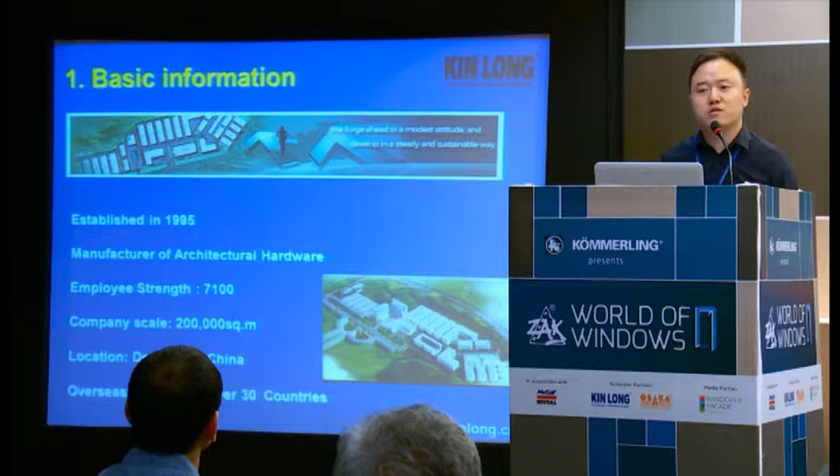It's about 2 hours by car to Hong Kong. Our branches now cover 30 countries, including Asia, the Middle East, and Africa.

Now, Kinlong achievement. We are China's biggest architecture hardware manufacturer, and we are China's biggest architecture hardware exporter. This information is from China government authority statistics. Our turnover for the last year was 25 billion rupees, which is crazy, I think. Our technical strength includes over 500 technicians, and we have 1 national lab. I mention this national lab is appointed by the China government, and Kinlong is the only one.

Our main products, I can explain one by one. First is aluminum doors and windows hardware fittings, the material is alloy. And UPVC door and windows hard fittings is also alloy.

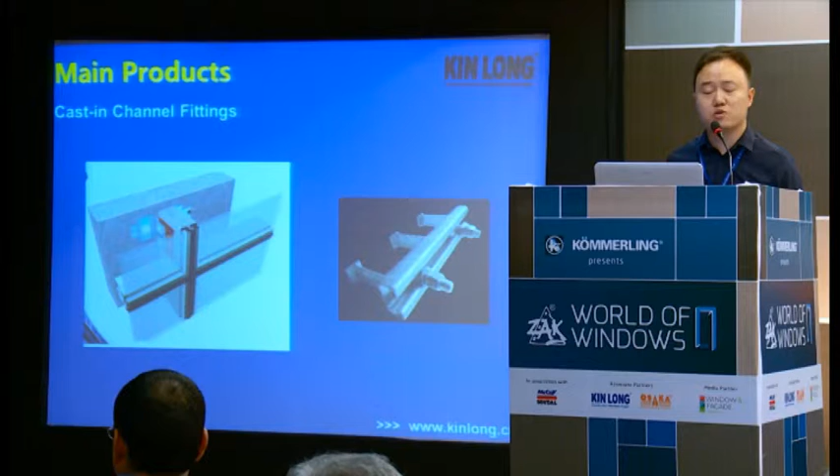We also provide cast-in channel fittings, the material is carbon steel or stainless steel. And indoor balustrade hardware fittings, you can see the double plate pillars, glass clamp, and bracket.

And outdoor balustrade hardware fittings. This product is used in a Middle East project.

And door control hardware fittings like door closer, floor spring, and glass clamp. And bathroom hardware fittings, glass clamp, glass door handles, multi-point lock and smart door lock.

I strongly recommend our stainless steel rod and cable system because we have a strong team to design the whole facade system and give you the solution for configuration, how to use it, and which part to use with our fittings.

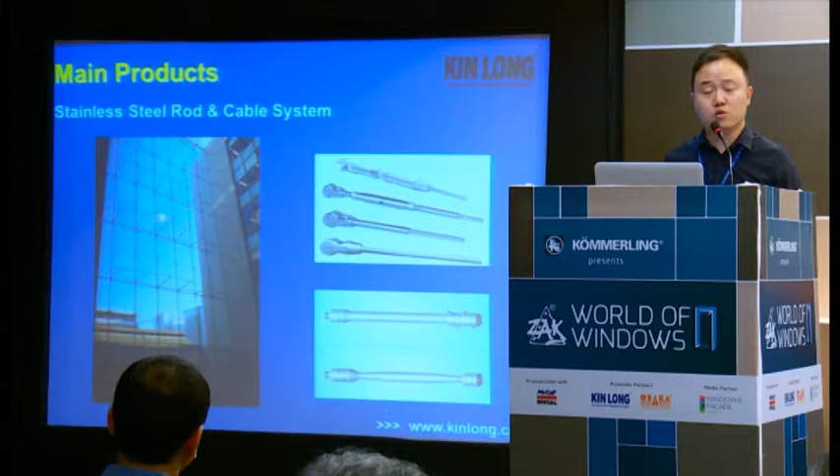The second part is the Kinlong quality control policy. Why is Kinlong so strong? Because we have a stringent quality control system. One, we refer to the ISO system, and the other is our China National Lab test.

This is a certification of ISO. This is our Kinlong in-house laboratory and testing center.

You can see the first picture is a lifespan test to test the handle cycle used. Commonly, Kinlong handles are used for over 25,000 cycles. The other is the optical spectrum test and chemical component analysis to check the purity of the materials and make sure the client is satisfied.

And the picture below shows the inside of our plant, with some coating, some packing, and some assembly.

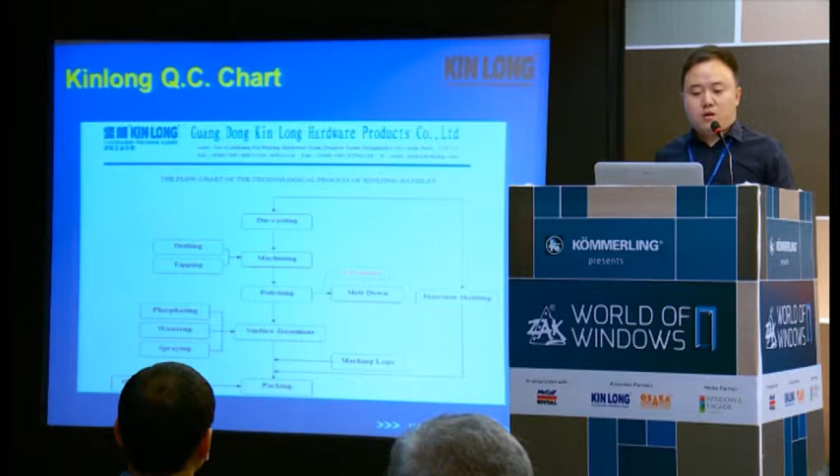Then our Kinlong QC chart. I suggest that handles divide into 5 procedures: firstly die casting, second is machine, third is polishing, fourth is surface treatment, and the last is packing. For the surface treatment, we use phosphating to protect the surface from rusting.

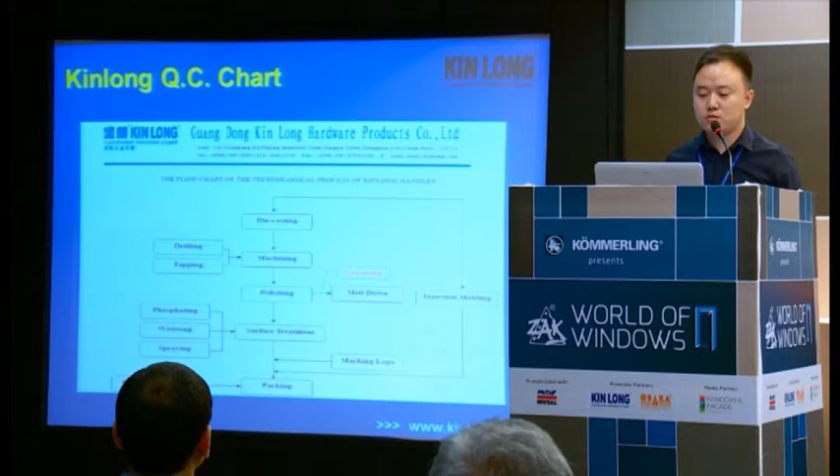The second is our Kinlong hinge. Firstly we cut the profile, then we punch, then we machine, then we grind, then we do surface treatment, and the last is packing. I think the phosphating is the same as our handles surface treatment.

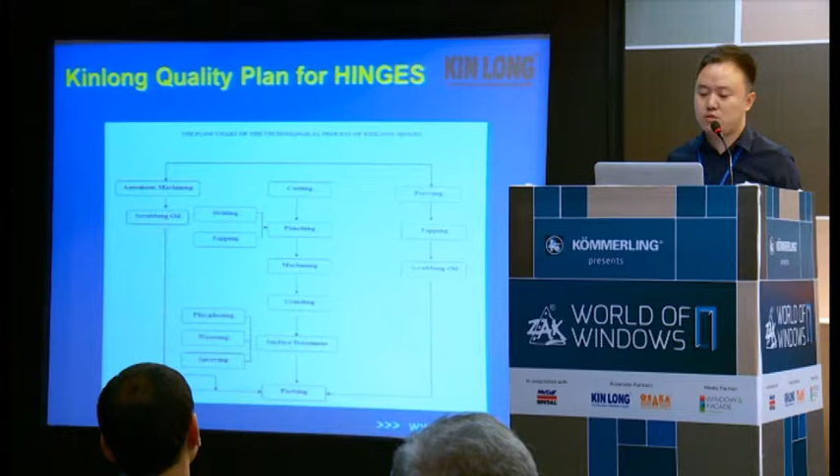Our Kinlong transmission: die casting, machine, polishing, electrophoresis, and packing. Why do we use electrophoresis? Because the transmission can't be surface coated, so we use electrophoresis treatment instead.

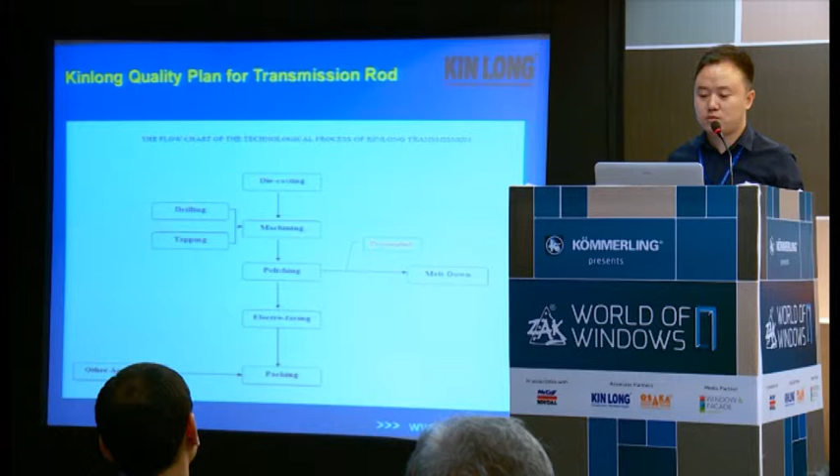The third is our sliding system. I want to recommend our sliding and folding door system. Its advantages are space saving, water tightness, air tightness, and thermal insulation.

This is our Kinlong hardware configuration for the sliding and folding system. You can see there's some handles, some rollers, some sockets. If you want to add to the whole system tightness, you can add more sockets to make sure the whole system is tight.

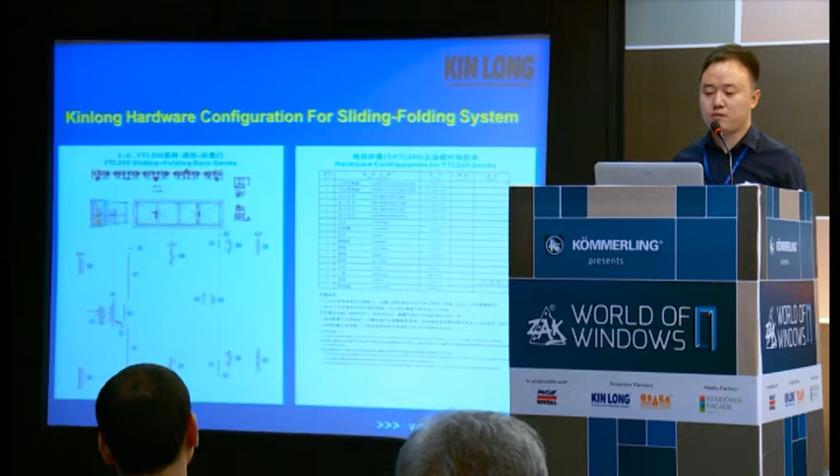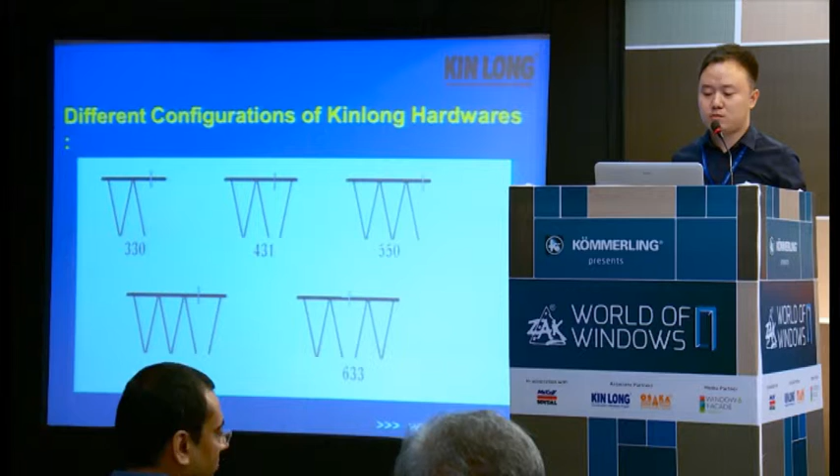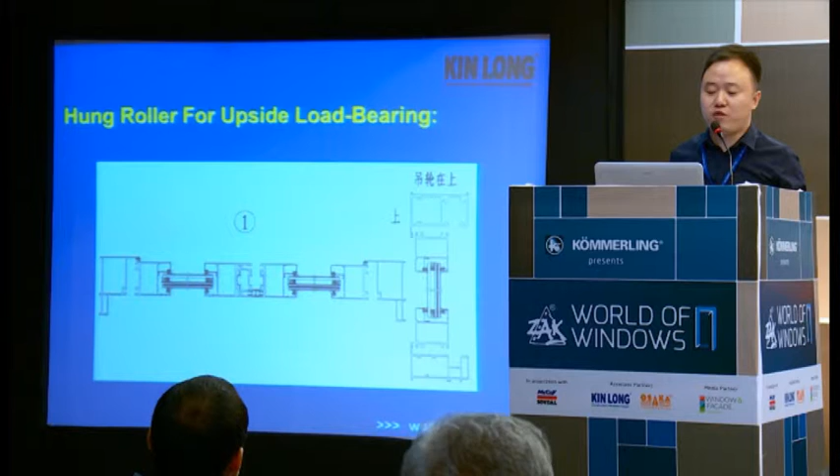Also for this system, we provided a special solution for the fabricator. One is for the roller, hung roller in the upside of the profiles. The other has the roller downstairs in the down profiles. The third solution uses hung rollers on both the up and down sides.

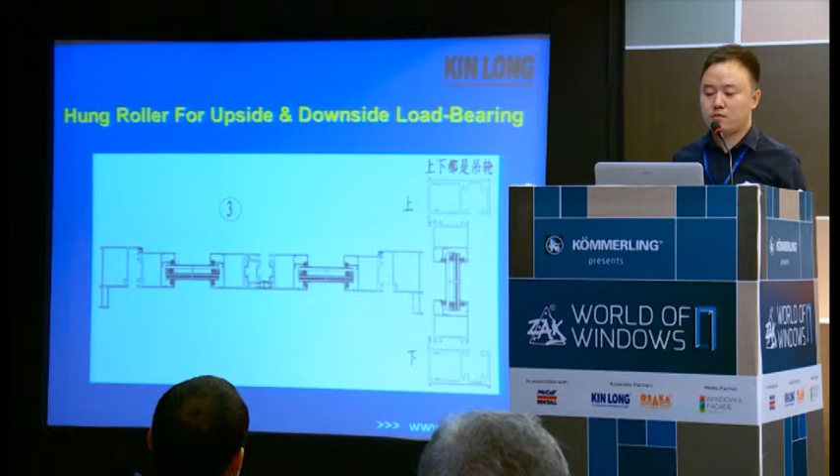Our Kinlong sliding folding system features the upper pivot hinge system. The roller is self-lubricating and the body is stainless 304. The roller can rotate 360 degrees to make sliding smoother, with two-direction up and down adjustment for the profiles to run more smoothly.

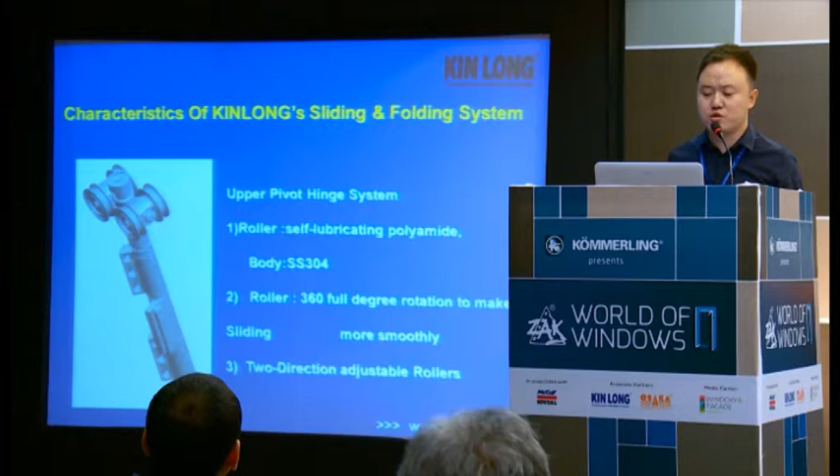Our side provides a hinge system with two point advantages. One is adjustable for easy profile assembly. The other assures better air tightness, water proofing, and lock tightness.

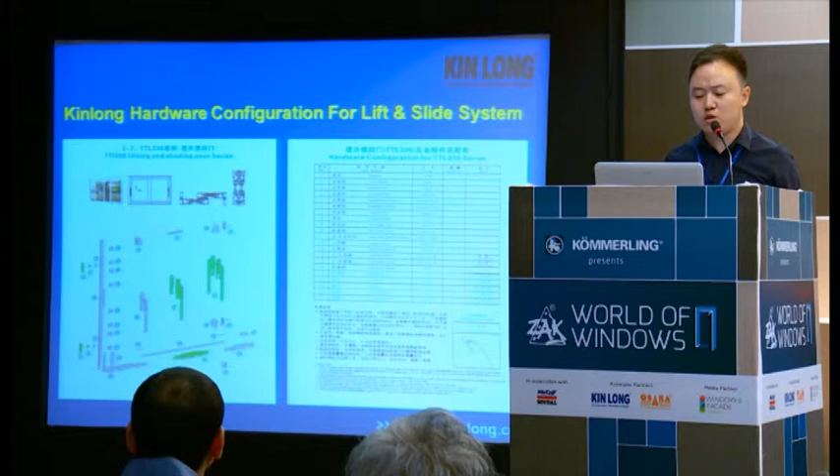So here's the configuration of this system. You can see some locking plates, front roller and back roller, and different handles for choice.

This system, we can offer the maximum size with a width of 3 meters, height of 2.6 meters. Single sash maximum loading is 300 kg.

That's our system operation demo. When the handle is vertical, it's closed. When the handle is down vertical, it's open. When it's horizontal, there is a lift. The whole system displacement is only 8 millimeters.

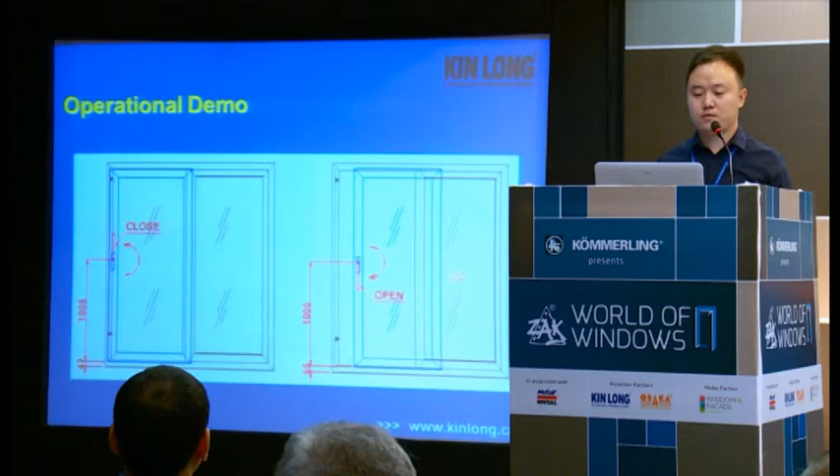Let me come to the last system, the sliding hung window system. Its advantages are matching high air requirements, space saving, and high safety.

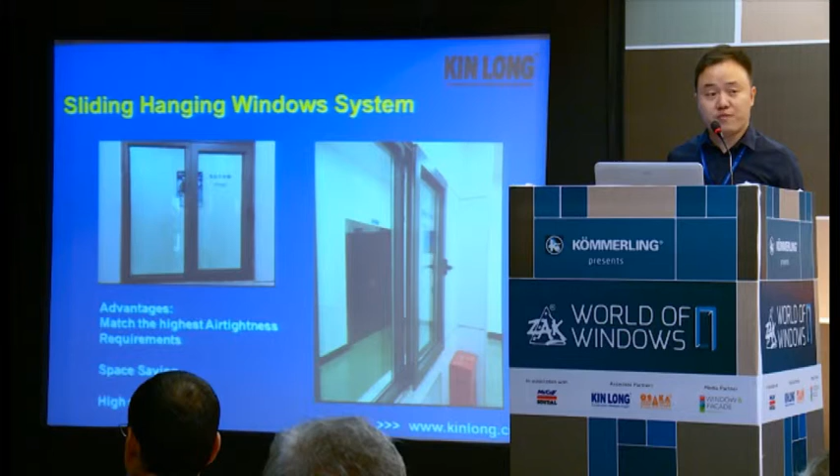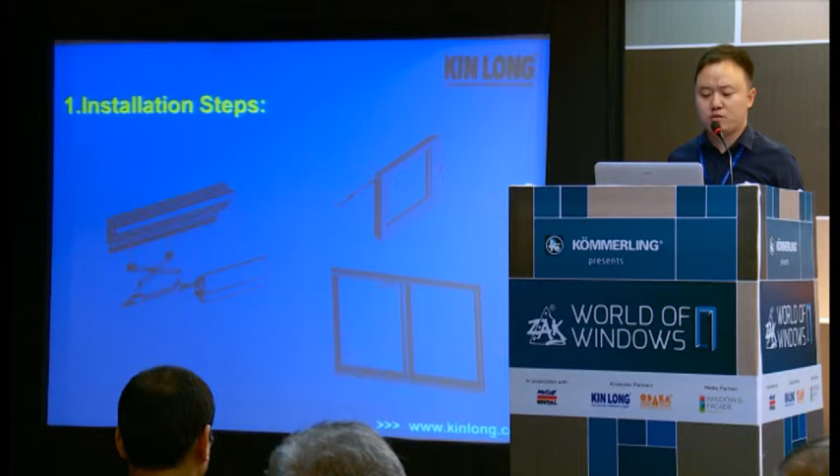This is our Kin Long configuration for this system. Let me recommend the installation steps. One, install the rod, the top rod. Second, install the side transmission rod. Third, install the handles. Fourth, install the rollers. Fifth, assemble the sash with the frame. And the last step is to finalize other accessories.

The fourth part is for Kin Long's prestigious projects in India. Kin Long has supplied many global renowned buildings and has been acknowledged by many consultants, architects, and clients all over the world.

One name I strongly recommend is our world-class project by Lodha. It's over 225 meters. I think the wind pressure is very, very high, but our hardware can withstand this pressure.